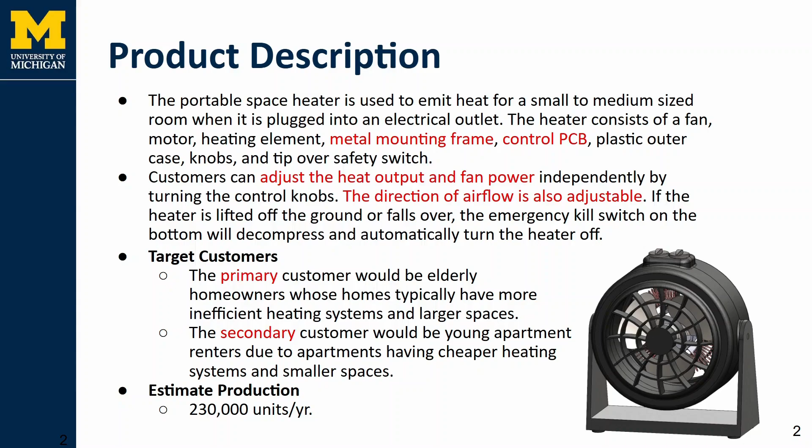The primary customer would be elderly homeowners whose homes typically have more inefficient heating systems and larger spaces. The secondary customer would be young apartment renters due to apartments having cheaper heating systems and smaller spaces. The estimated annual production is 230,000 units.

The core function of our space heater is simple: heat the space. To do that, it must meet two key functional requirements. 1. Create heat by converting energy, and 2. Direct the heat by generating airflow and adjusting its direction, either by selecting an angle or physically moving the unit.

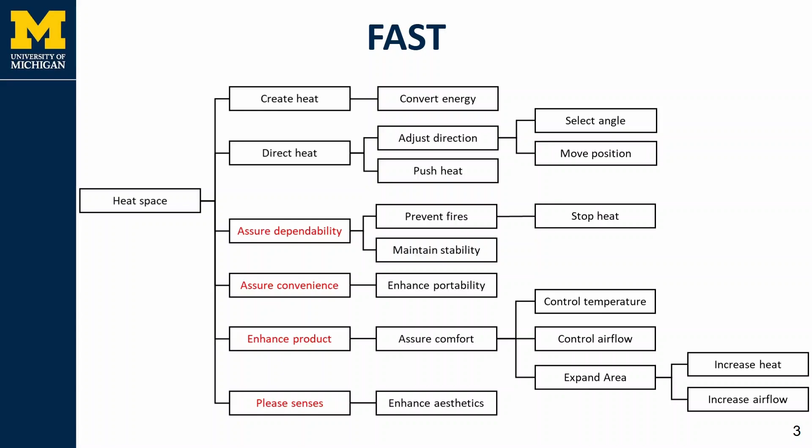Beyond heating, the product must also ensure safety and reliability. It should stop heating when tipped over and remain stable during use. It must offer convenience and portability to fit easily into users' lives. To stand out in the market, our heater includes features like easy temperature control, airflow control, expanded coverage by increasing airflow or heat, and enhanced aesthetics to appeal to customer preferences.

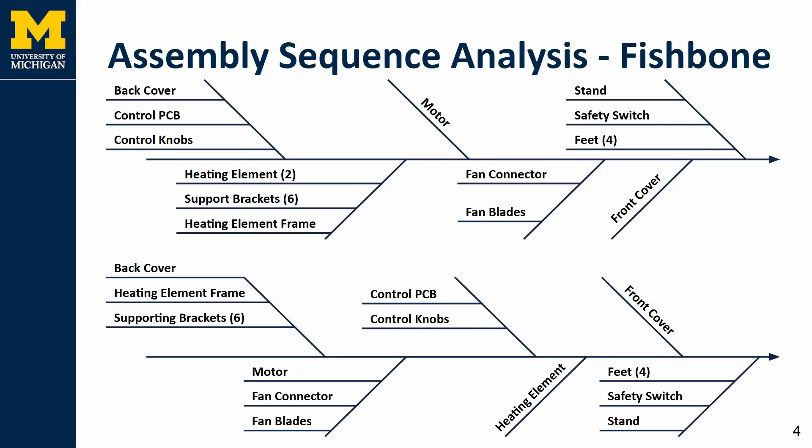In the second sequence, the back cover assembly now includes the heating element frame and support brackets, followed by the fan motor subassembly. The control PCB and knob subassembly is then added along with the heating element. Finally, the front cover is added, then the stand subassembly is added to create the heater assembly. By comparing the assembly sequences, we can see the second sequence is preferred due to having a higher ranking and ease of locating parts, testing subassemblies, and assembling in parallel.

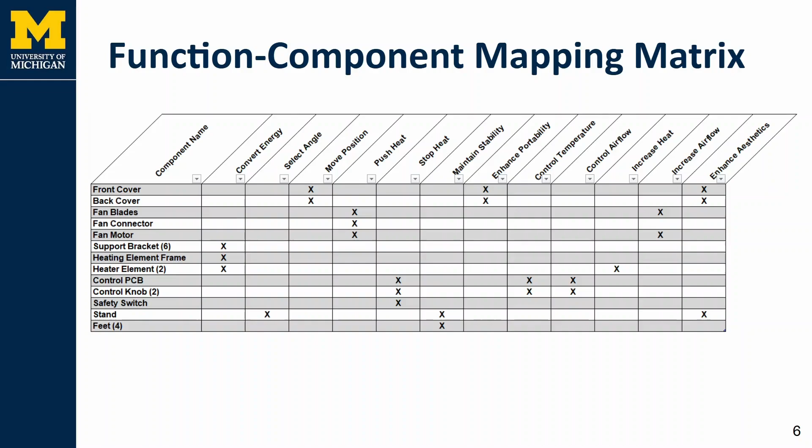In the functional component matrix, all of our components are assigned to at least one function from the FAST diagram. In addition, none of our functions have over 40% of the components assigned to it. Components such as the heating elements and the fan blades are assigned to functions relating to the production and distribution of the heat and airflow. Other components such as the control PCB and knobs are assigned to functions relating to the control of the heat and the airflow.

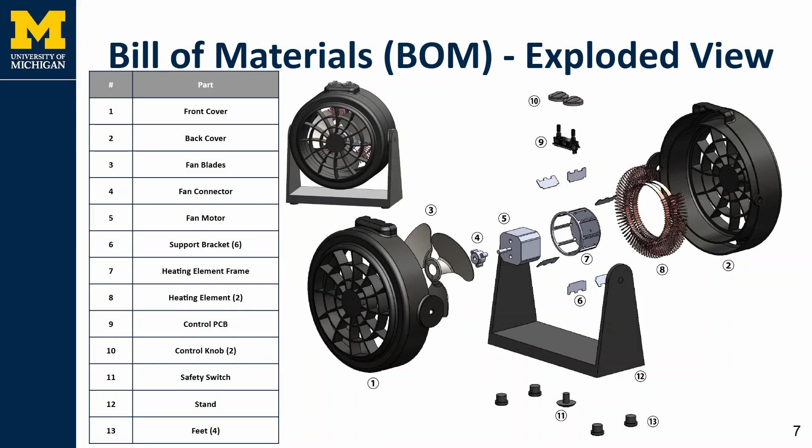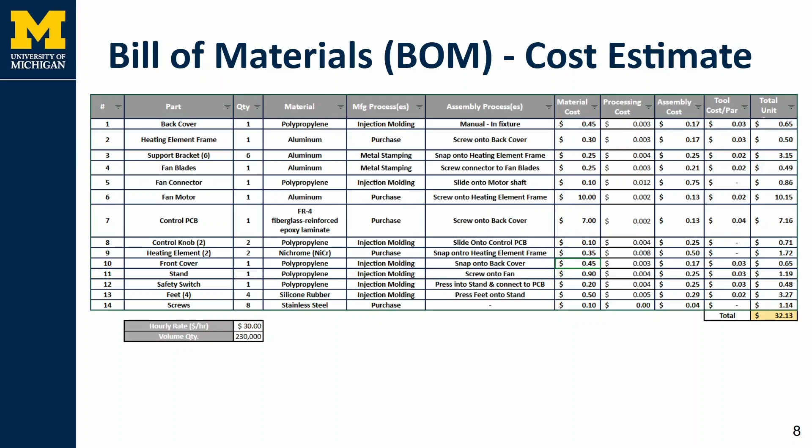We also have various methods of manufacturing. For example, injection molding for our covers, fan connectors, knobs, and stand, and metal stamping for our metallic components like the fan blades and support brackets. This breakdown also helps us identify areas that we might target for cost reduction. But comparing our cost of $32 to the average retail price of $60, we are around 54% of the retail price of an average space heater.

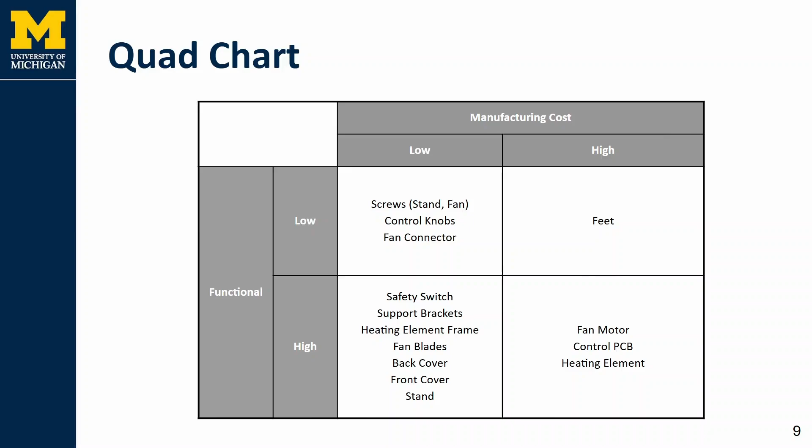After comparing the FAST diagram functions with our primary and secondary customer groups, we found that only select angle and increase heat need to differ. Secondary customers, young apartment renters, have smaller spaces and don't need these features. In contrast, our primary customers, older individuals with larger, outdated homes, benefit from both angle flexibility and higher heat output.

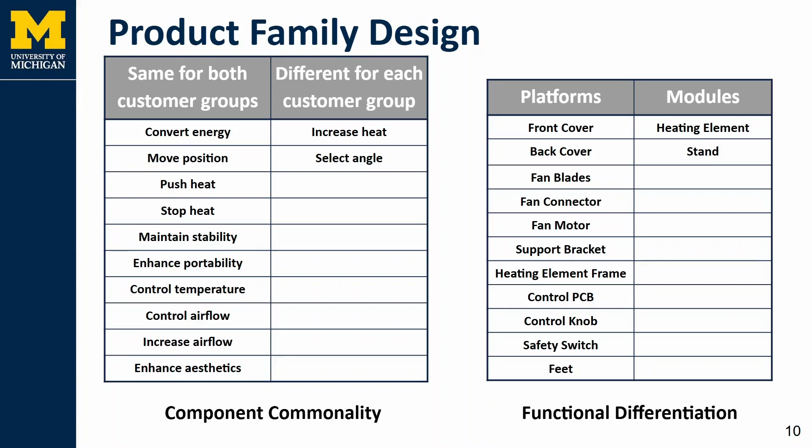We've designed two variable modules to support this: the heating element, which can include an additional coil for more heat, and the stand, which can be fixed or angle adjustable. Despite these differences, the heating element frame design remains the same, accommodating either one or two heating coils. Similarly, the mounting points for the stand are standardized, regardless of whether angle adjustment is included.

The first interface for the secondary product is the supporting bracket that connects the heating elements to both the fan motor and the back cover. The second version has only one heating element that connects in the exact same way to the rest of the assembly as the primary version, which has two heating elements.

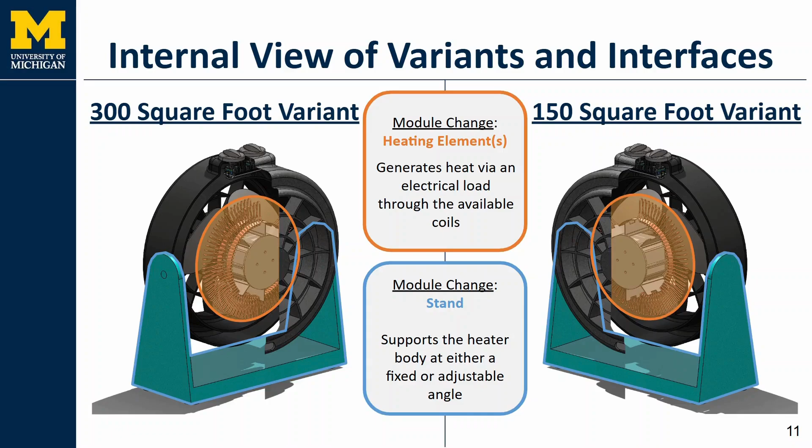The second interface for the secondary product are the covers which connect the supporting bracket to both the 4 feet and the safety switch. The secondary version has its mounting angle fixed, whereas the primary version's connections allow the end user to adjust the angle of the main heater assembly.

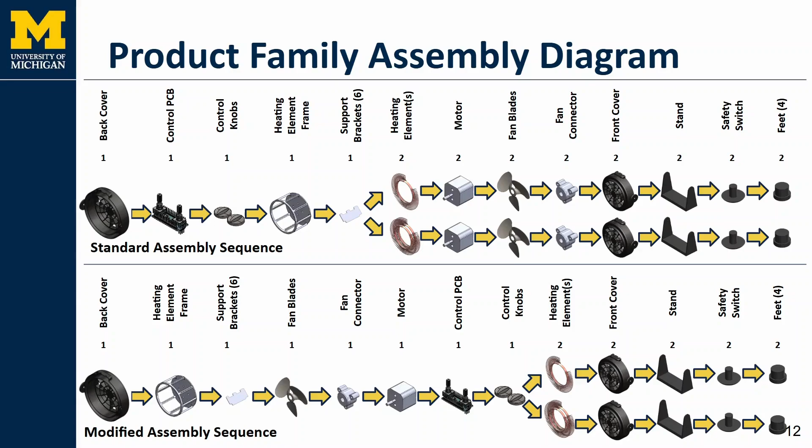The standard assembly sequence for the heater leads to installing one of our variant components, the heating element, early in the process. This creates unnecessary variation for common components such as the fan blades. By shifting the element placement to the last step before loading the front cover of the heater, this increases the number of common components installed prior to the product variation formation.